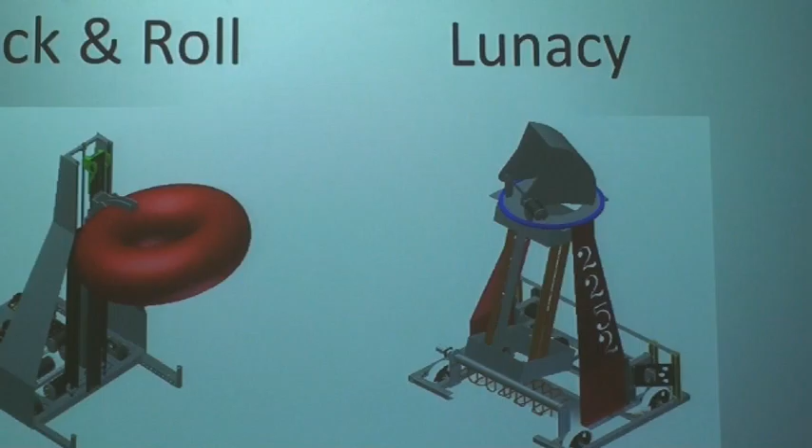Another thing I would recommend for a rookie team is to go with a common kit of parts. So we've drawn all our robots, and I have the CAD model or a picture of the CAD model for every one of our robots except the 2008 robot, which had a whole bunch of bad ideas. We ended up doing some stuff with tubing that we weren't able to draw correctly in 2008, as mentors or as a team, as students.

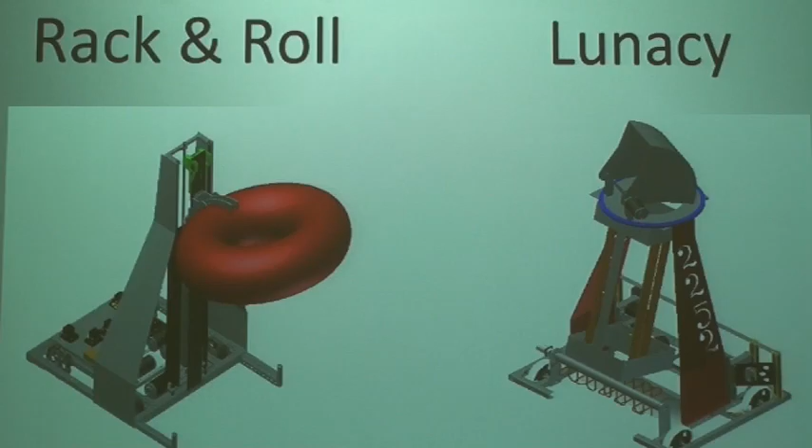That was our rookie robot, and of course then there's the 2009 robot—just a sound robot. We hardly ever touched it mechanically at a regional. We just missed on concept, on what to do or how to play that game that year.

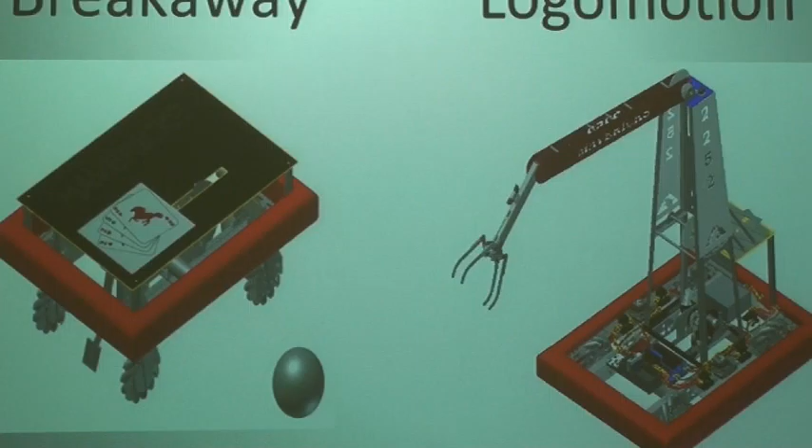2010 robot, first year we put transmissions in a tubing. I think the next year AndyMark was selling them, as far as transmissions in a tubing, or we recognized that they were selling them. I don't know when they started selling them. Instead of coming with a kit of parts, we bought aluminum tubing, drilled and reamed the holes to put the bearings in, assembled the gears into a piece of tubing, and mounted the motors to the tubing. We'll look at that clearly here in a little bit and show you how we've done that.

Some of the things I'm going to show you, if you're a rookie team or a new team, I don't know that I would recommend doing. But if you never do it or start thinking that way, you're not going to take that next step. Don't try it for the first time in season though. As a recommendation, I would almost always go with the kit of parts frame because it's very nicely done nowadays.

We've gone away from it entirely for the last couple of years. The thing that I found in the 5 or so years I've been involved with FIRST is drive base, drive base, drive base, drive base. Get it right, get it sound. You can't touch those expensive lawn ornaments if the drive isn't right, so get that part right.

We used a kit of parts drive base in 2013, and I'll tell you that's our best robot. By the end of the competition season, our OPR was 69th in the world. Was that the kit of parts from '13? It was C-channel, wasn't it? The Frisbee robot was kit of parts. Is that what the kit of parts was then?

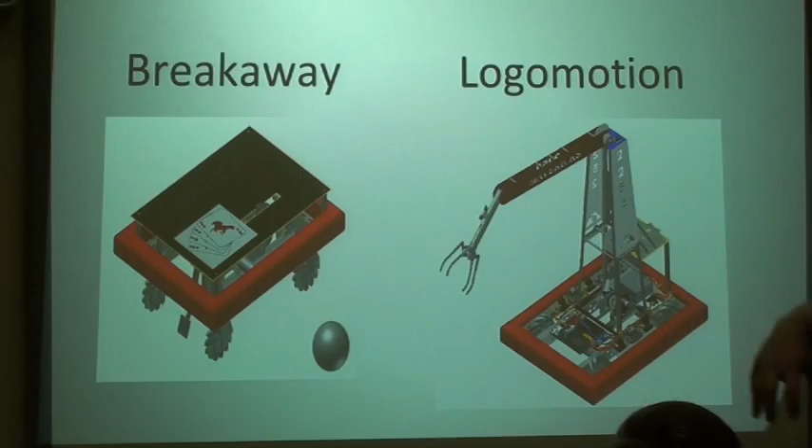What we did here, I think, was neat. Two motors, and the way we tied those transmissions together to make the shaft turn and make this arm work together. I don't think I got a lot of that in the CAD model.

Rebound Rumble, a very sound robot there. We did some stuff here with a steel locking pin off of an air cylinder to keep this down, to knock the ramp down that year. I don't know if you were involved that year, but it took a little more force than what people thought it was going to take to push that ramp down to drive up on it. Yeah, it was a teeter-totter sort of ramp, and the end game was to try and get as many robots as you could on that teeter-totter. So one of your alliance members had to be able to move the ramp down so that your alliance could drive up. That's the purpose of that swinging arm.

Second year we did a turret, a powered turret. Both times we've done a powered turret, we've not used it. We put a lot of design time into having a turret that's powered so we can take our shot, because we're imagining this is going to be some kind of great advantage, but both times we basically just kept it in one spot. I would say that if you're going to camera track though, a powered turret's the only way to do it, because to turn the whole robot you just can't get fast enough. So if you're going to get to that point where you can camera track, you've got to do that.

And I think that was the goal, at least in 2012 - thinking we could make our shot from any angle with that turret and not have to turn the robot. But really, we kept it simple.

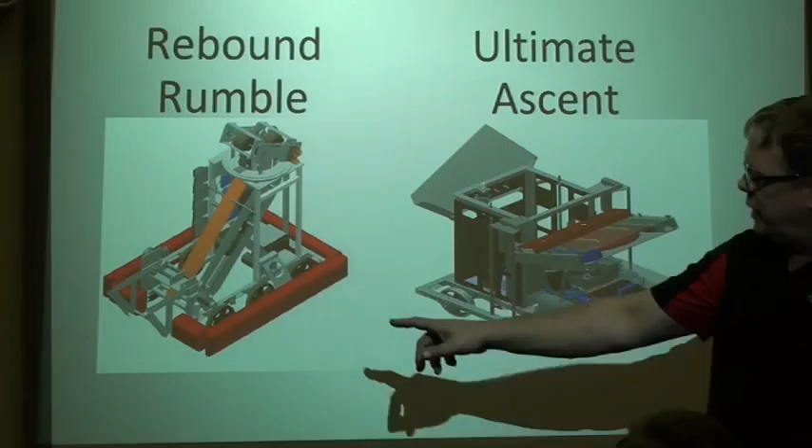A lot of that is just these two rails and this belt drive system that intakes the ball. That was a relatively simple design - just two pieces of flat 1/8 inch aluminum tied together with some standoffs, and that urethane belting which we really like and have used in a lot of different ways. You can buy it and melt it together to any distance you want - we get it from MSC.

I think it's 2-inch wide stuff - yep, that's that 2-inch belting. We've used that a couple of times. We've also used the same thing in 1/4-inch polycord.

Yeah, there's our best robot from a competition standpoint. We did everything wrong you could possibly do, but man, it just worked and it worked and it worked.

Yes, that shot full field. I've got a video I'll show you here. I can't remember which ones shot full field that year and which ones didn't, but I know some teams said they could shoot full field but never did it on the field because they were too short - you had to be tall to shoot full field that year, otherwise it was too easy to block.

The thing I've seen about throwing objects, in the time we've done it, is to chuck it as hard as you can - it seems to give you a better shot pattern. It's kind of been our approach most years: just throw it as hard as you can.

We had a 3-wheel here, and each successive drive was a little bit faster. This last one, we were running wide open 1-to-1 on a 550 motor, 775 motor - that's spooled at 19,000 RPM. We had a weight on here - that's something we learned this year.

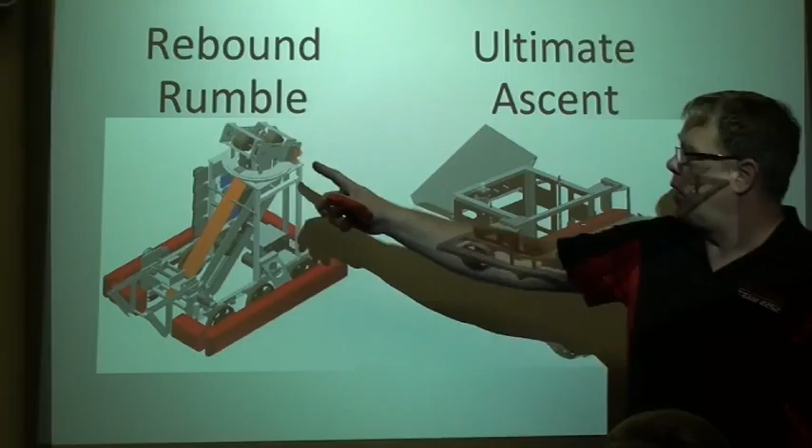I argued with Alex that it wasn't going to work, it wasn't going to work. And Alex said, yeah, let's put a weight on it. And Alex was right - that momentum, keeping it spinning, meant our shot didn't die, and it really increased our accuracy.

So we put a weight on the wheel, so once you get that momentum going, when the ball goes in there it doesn't shock the RPMs down - it doesn't slow it down. Alex is our smart guy on this. What do you think, Alex - is this going to be okay, or is this crazy?

But anyway, let's clarify that we basically defer to the students when it comes to their design preferences. So our design process starts really with a review of the kickoff - we're going to go through all that, that's all coming up.

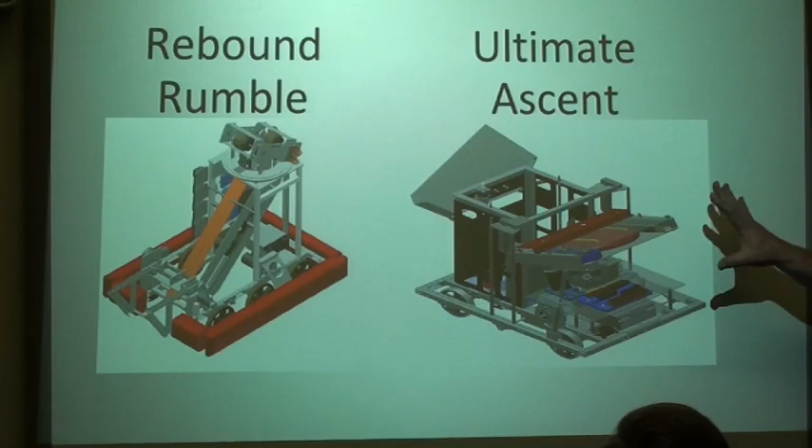I didn't spend much time on these - we can go through these pictures. This is how much I believe in drawing a robot. This isn't my presentation, this is just our robots. I could tell you a story about every one of them. Just a beautiful, beautiful robot.

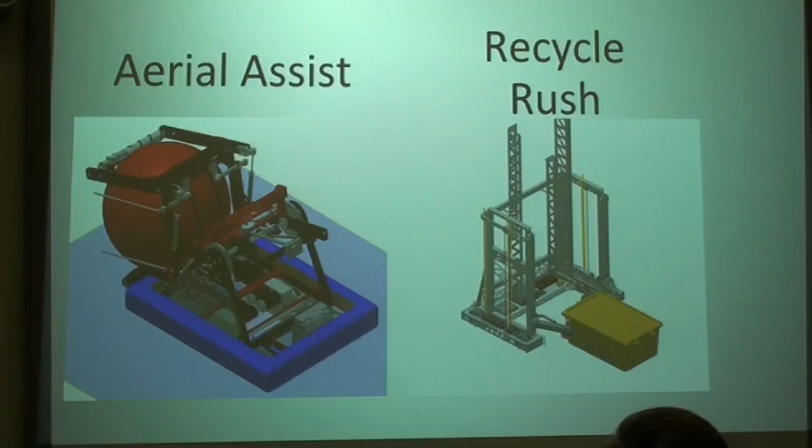This was our really bad CAD year, where we had parts going through parts that just didn't work after we bagged it. It's a miracle that we recovered to where we did. And we had a fantastic autonomous - one of the best autonomouses I'd seen that year, in my opinion, besides the team that did it all.

We bagged that robot and had no way to pick up a tote - yeah, bad robot, you couldn't. The parts we had designed to pick up the tote went through other parts and did not work.

Last year's robot, I think we had one of the best shots that I saw - we had a dead shot, and I think at the end of the season we were the second most accurate robot around. We learned how to shoot a ball - we think we're getting pretty good at that.

What we learned there was a lot of times we went 2-wheel. We think one wheel is always the way to go, but when you got to process a ball through a robot, sometimes different things can happen. So one wheel spinning and a chute to let the ball roll against - you got to really pay attention to that contact area. And that's what we played around with to try to get the best shot we could, and how much we're squeezing it, when we stop squeezing it, where we let it go. You can't let it pop out at the end and have the ball shake and deflect your shot. Those are things we learned with the 2-wheel shooter, the basketball shooter.

That basketball robot was a really, really good robot, but our shot wasn't consistent. We had a veteran team, good drivers. We learned that pressing a ball between 2 wheels and letting it come out like that causes a flight problem, a shot consistency problem. I think we nailed our shot consistency last year because of lessons learned.

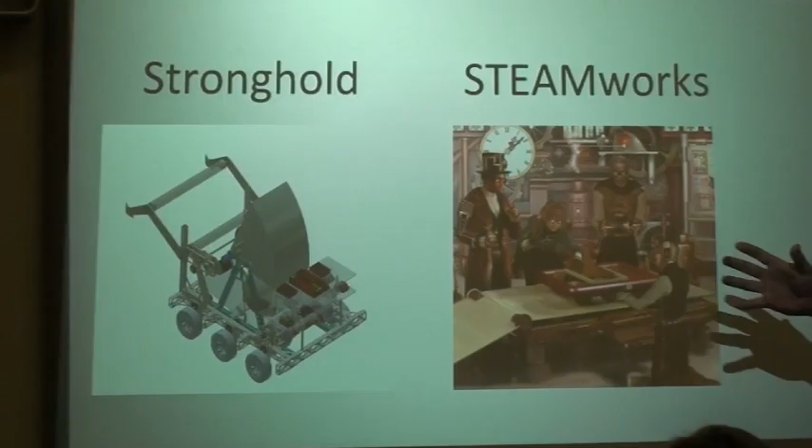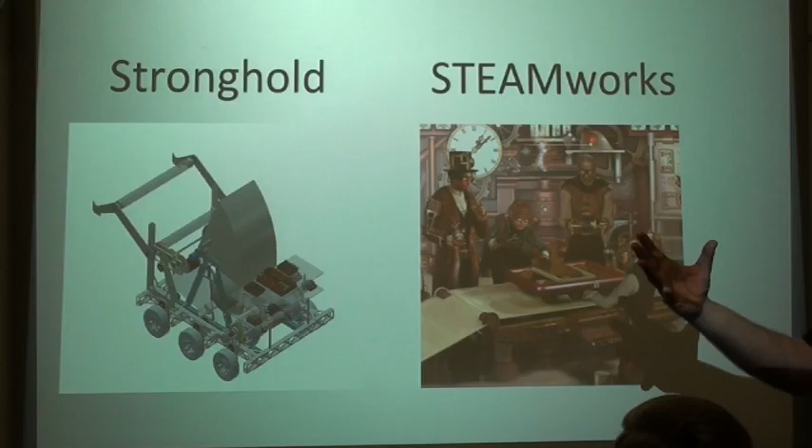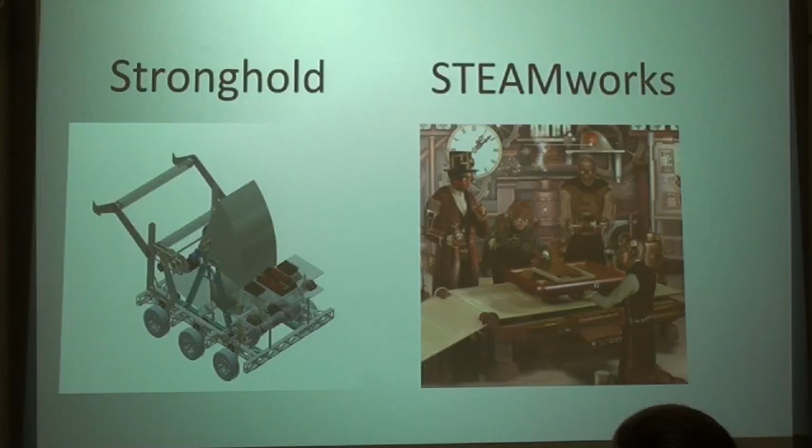Yes, and now take particular attention to STEAM. That's a new buzzword - remember, it was just STEM. Right, now arts, now it's STEAM. So imagining this is an art - this is going to be an art game. There's going to be an art spin on the game because of that Steamworks. Science, technology - no, I thought it was water because of steam. I don't think we're getting a water game. But anyway, that's just fun speculation, in my opinion.

All right, so this is how we do things. We watch kickoff together in a room together. We go through the rules as a team, and usually we go through them twice, sometimes 3 times. Then we tell them to go home and read them again.

We divide our team members into brainstorming subgroups. I take my veterans and go 1, 2, 3, 4, 5 - you guys are the team captains. Then I go through and have the rest of them count off if they're the inexperienced people. If I have more than 5 experienced people in the room, or what I consider veteran team members, I put 2 of them on a team. Or if I have 1 really strong person and 2 who are kind of not, I put them on a team together. This is just a brainstorming sub-team.

Normally for what it's worth, we've got about 22 as the most we've ever had - 22 what I would call participators. You know, we might get as high as 30 kids to come out, but you've got 20 that are engaged, and that's a really good year. Yes, and those are tough things to do, engaging that many kids. We had a coach call it bacon and eggs - the chicken was involved in breakfast, the pig was committed.

So what we task them with is coming up with a robot concept, a drive-based decision, and then we ask them to justify it. So many times during this first initial going through the rules, we've done a really good job of analyzing the scoring system, talking about the scoring system so that we understand what kind of a robot we think is going to play the game well. And in some years there's different types of robots. When I think about different types of robots, it's hard to be everything and do it all, but you want to be able to contribute to an alliance.

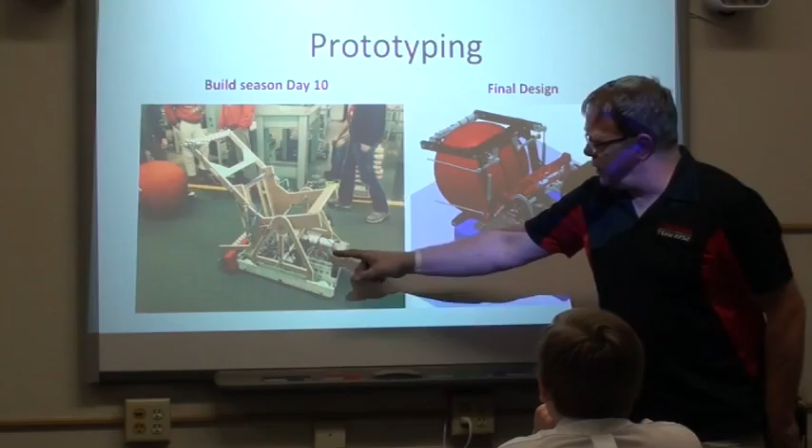Go to the next page, we got a video of how we operational prototyped in ten days. I'm telling you, this was our robot ten days into build. That's not always what would be our target. Oh no, jeez, no, this was...

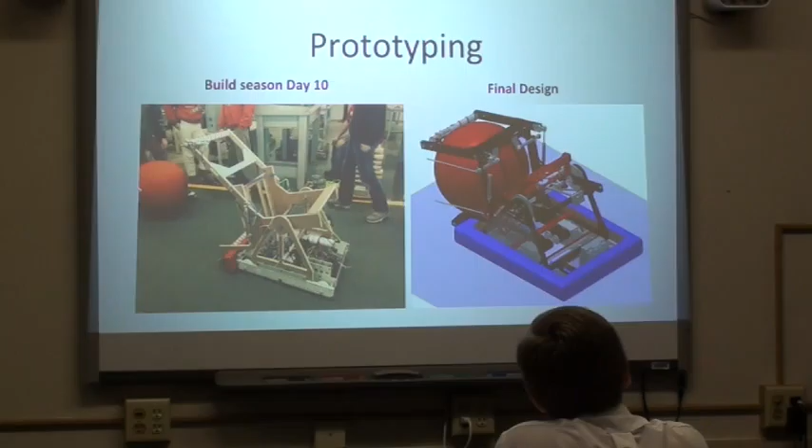I'll talk about this season in a minute, because I went back to when Alex's daughter joined our team in 2011 as a freshman. Wide-eyed, she'd already been around, she was button girl before that, she'd been with us since 2007, just a really good kid. We also had another kid who had taken a Vex robotics camp for us, a really bright boy who caught on right away. His eyes were wide open as a freshman, and he watched it all happen. He grew into that student who drew every single part on that robot.

I gotta get it up. That year, we didn't fab parts until the CAD model was done. That's the only year we've ever done it. Perfect. That was the perfect way to do it.

We had 3 days this season at the beginning of the year that we lost to snow days. On our website we had a sharing forum space for ourselves, a shared space for ideas, ready to share if we had time to look at it. We threw this in, and then when we came back we had this concept and drew it up.

This is the beauty of prototyping out of wood and having the CNC router right there. We drew just what we had. We have engineers that will design up to week 5 or 6 and expect everything to just work, but it never works like that. This was the first year we had a complete prototype like that, where we had basically the entire thing.

What would you say is a good target, having a moderately functional, complete robot by 3 weeks, by 4 weeks? When would you say, boy, if you don't have this happening by this date? I would love to see the drive base rolling in 10 days and then be prototyping on top of it. That would be my ideal, to have a rolling base at 2 weeks.

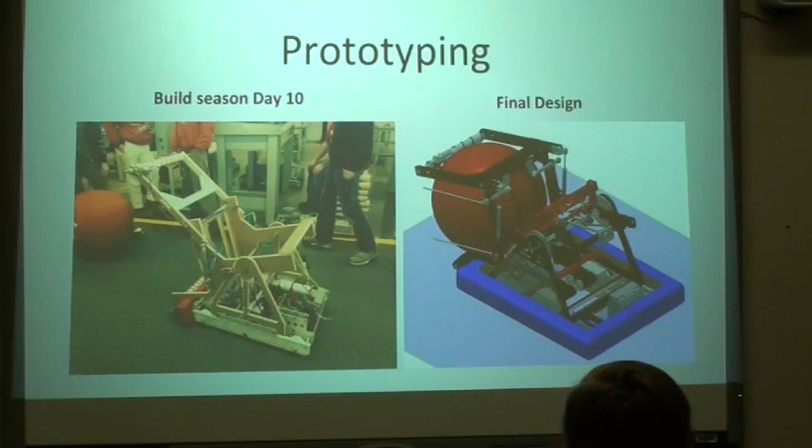The headache we get into is we get no practice time. And then we learn at the first regional what we should have learned in practice. We learn at the second regional what we should have learned at the first regional, and you never catch up. Yeah, we go through that.

The other thing we'll do is we've got a couple old rolling bases. We won't necessarily even prototype on our current rolling base. We've got a video from last year where we prototyped - we just bolted it onto an old frame that was just laying around. It had the wheel height we wanted, so we could roll around and see that we could pick the ball up. So it doesn't have to be your actual rolling base. This is the video of that prototype.

Last year we tried to build 2 robots, the thought being we could practice with the second one after the first one's in the bag. Amazingly, the engineers kept tinkering and wouldn't let us practice with the second robot. Somebody has to be smart about it - I want to do this, somebody else wants to do that, but at some point you've got to stop and do those things. We had a mentor one year who said at some point during the season, the engineers have to be shot and the drivers have to be let to practice, because they won't stop designing it.

While he's bringing up that video - something we believe in, we believe in CAD, we believe in CAD. We've been producing CAD drawings for our prints for our parts ever since we've been doing CAD. I don't know why it took us so long, but in 2013 we started producing a book to share with judges or include in our kits of individual parts, and this was our dirty copy. I couldn't find the regular copy - this was our shop copy. This is one of our goals every year, to have this CAD book happen.